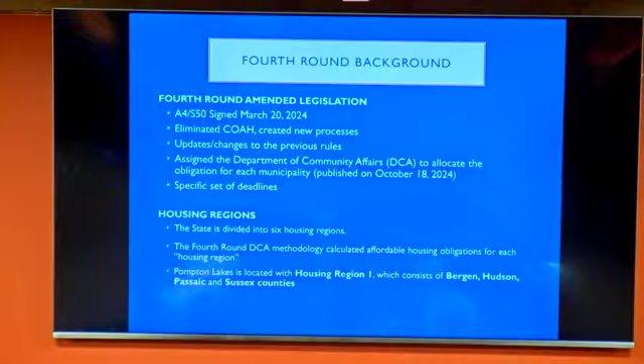It eliminated COAH, created new processes, updated and changed the previous rules, and assigned the Department of Community Affairs to allocate obligation for each municipality. It was published in October of last year, and that set forth specific deadlines, which I'll get to in a bit. So when we talk about affordable housing, every municipality has to provide their fair share for the region.

This is all mandated through the legislation. It's been around for almost 40 years, and the state is divided into 6 housing regions. The DCA calculated affordable housing for each of those regions, and Pompton Lakes is part of Housing Region 1, which consists of Bergen, Hudson, Passaic, and Sussex counties.

So for Region 1, what is affordable housing? Affordable housing is housing that's rented or sold by households classified as low and moderate income. The municipality must provide units as per their fair share, and each affordable unit must be reserved for low or moderate income for a period up to 40 years, enforced through a deed restriction.

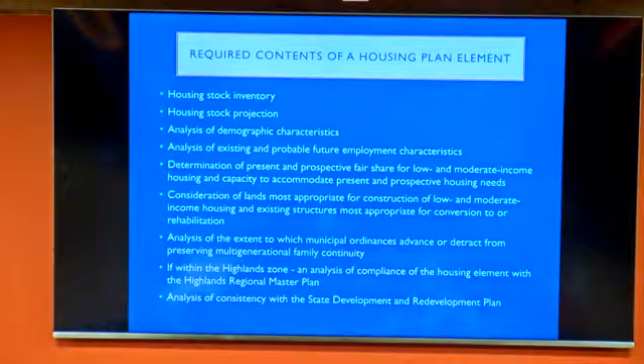So I go on to the next. What are the required contents of a housing plan element? The document that I submitted is basically based on what's required by statute. So we look at population demographic changes, employment characteristics, housing stock. We also look at lands most appropriate for construction of low and moderate income housing. And if it's within Highlands, we analyze compliance with Highlands and also look at consistency with the New Jersey State Development and Redevelopment Plan.

So, based on the DCA number, we have two things that we need to satisfy. First is present need, which is the rehabilitation share. It's an estimate of existing deficient housing currently occupied by low and moderate income households. They use census data; there's a whole process they've been using for the past 40 years. Our obligation is 45, and what that means is we don't have to do anything except have a program in place, which we've had.

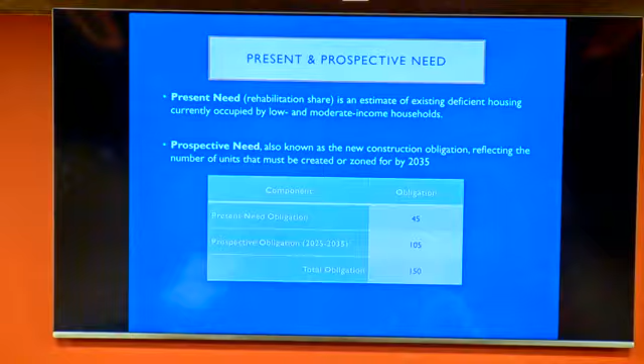I think we have Triad, who is our affordable housing administrator, so this is just a continuation of that. But then a new thing is the new construction obligation, which is prospective need. This reflects the number of units that must be created, zoned, or planned for the period from 2025 until 2035, the next 10 years. And that obligation is a total of 105.

So the statutes changed, and basically there are certain percentages that need to be allocated to family housing. There's a threshold for age-restricted housing, rental housing, low income, and very low income. And there's that threshold, as I mentioned, that is applicable to all affordable housing plans throughout the state. This is as per the statutes.

So now, really what is important is, can we really plan all the 105 units, which we all know is difficult since the town is built out, right? But the statutes allow for something called a vacant land analysis.

So when a municipality like Pompton Lakes lacks sufficient developable land, it's entitled to a vacant land adjustment, where a municipality is required to identify how much vacant land is truly available, and based on that, must create a realistic development potential, called the RDP.

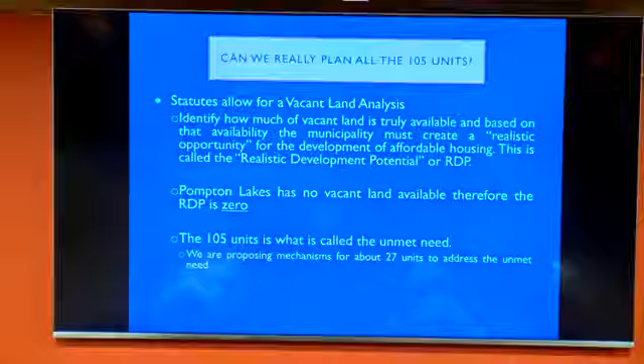The 105 units then is now what we call unmet need. That has changed with the new statutes, with the A4 legislation. In the past, you could just say this is your unmet need, and we understand we need to satisfy it.

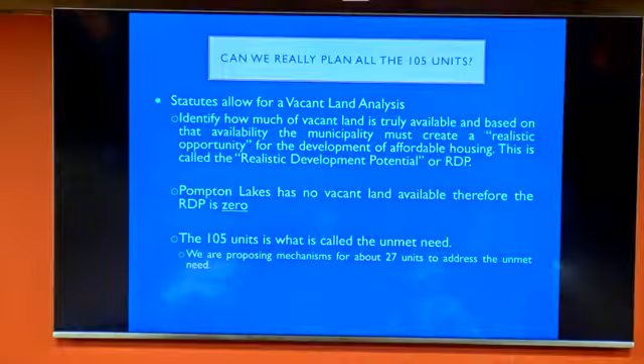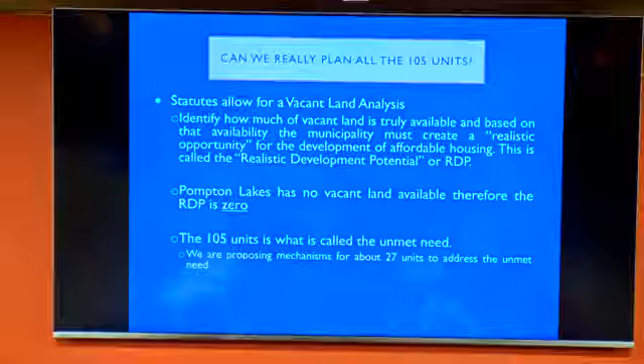In this iteration, the legislation wants to provide mechanisms to address at least 25% of the adjusted number. So 25% of 105 is about 27. The legislation isn't clear, we're not sure exactly what it means, but this is the most conservative approach, so we've taken that into consideration.

Moving on to the next slide - so how are we going to address the 27 units?

Our prior round had anticipated planning for future rounds, and in that was the Tilcon Quarry site and the areas around it, which was proposed to be rezoned to AH1, which the governing body did on December 4th, 2019 through Ordinance Number 19-26.

So we already have that affordable housing zone, and we anticipate this will create a total of 27 affordable units, which can be used to address our affordable housing need.

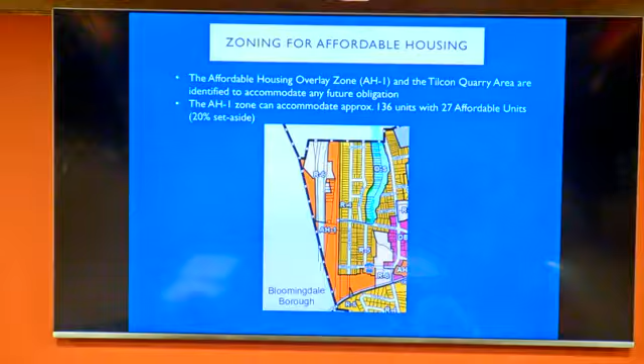Thank you. Okay, we'll go to the board first to see if you all have any questions about the presentation and what the state numbers are and what our method is of satisfying the state numbers.

I've got all my questions answered already. Okay, anybody on the board have any questions?

We're required to have a public session on this so the public has a chance to comment. It becomes part of the record. If you care to comment, come forward, state your name and address, and you will be sworn in because it needs to go on the record to the state.

So with that said, does anyone in the audience care to participate in the open session? Seeing none, I'm going to close the public session. We'll just note that there were no comments.

If the board is satisfied and doesn't have any questions, you do have a resolution that we prepared - it's adopting the housing element fair share plan and amending your master plan. If there are no questions and you're satisfied, I would recommend it be considered for approval.

Okay, so I need a motion to approve the resolution adopting the housing element and fair share plan and amending the master plan for the Borough of Pompton Lakes. I need a motion and a second. I'll make the motion. Mr. Trost? Second. Mr. Keating?

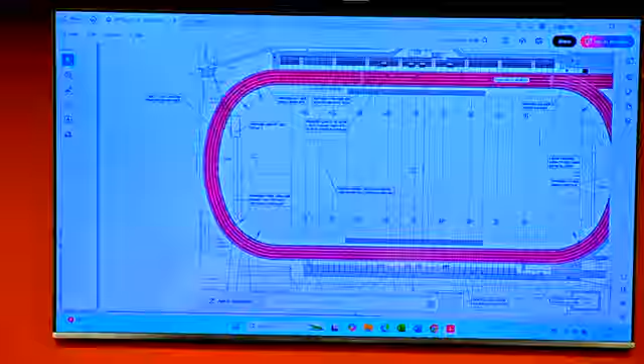So what you have in front of you is a proposed plan for improvements to the Board of Ed owned property down at Hirschfield Park. It includes replacement of the bleachers on both sides, replacing the existing press box, and replacing the cinder track with all-weather synthetic track. The limitation on the project, for various reasons, is that the Board of Ed has to stay within the existing footprint. So in looking at all of the possible options, and it's been a priority of the board for a number of years to make improvements down at Hirschfield, this is what we think is the best path forward.

To my right is Fei Shi. She is an engineer with LAN Associates, which is the architectural and engineering firm that the board uses. Thank you for the introduction. Hi everyone, my name is Fei Shi. I'm a professional engineer licensed in the state of New Jersey. My current license is valid until April 2026. I'm currently employed by LAN Associates in Midland Park, Bergen County. I have testified as a professional engineer in Paramus, Bergen County, Peapack-Gladstone, Somerset County, and also I've testified at this board for the Lakeside Middle School bleacher project last year, I think.

So I will quickly walk through the scope of work and some background information on this project. Just so you know, the electronic copy is a little different than the latest site plan that I have sent to the professionals and the board, so there's a slight change on the screen right now. The district wishes to improve their athletic facilities by replacing the running track, press box, and bleachers, along with the perimeter fencing and sidewalk installations. So this shows the new improvements that we have.

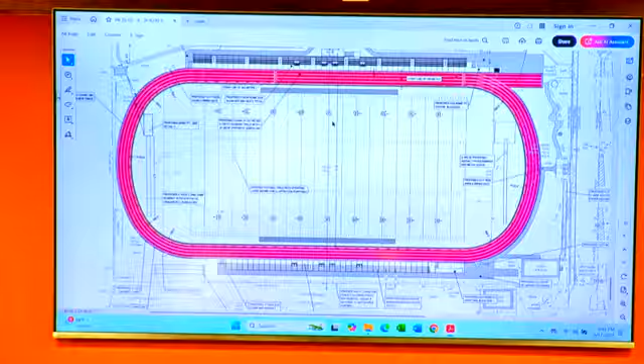We are going to propose 4 lanes of rubberized running track, and we're going to provide about 800 seating for the home side, which is Plan North, where my cursor is. And we're providing about 500 seating capacity for the visitor bleacher at the Plan South. Just so you know, the river is at the bottom of the plan, and the north is to the left-hand side. Our site is currently located on Hirschfield Park Place, and the site is bordered by the borough's properties.

So I covered the bleacher and press box. Because the disturbance is over 1 acre, this triggers the project to be classified as a major development defined by NJAC 7:8. We have proposed a 2.5 foot deep stormwater basin at this location. No, just one, yeah. We combined it. So it's showing 2 basins right now, but we have revised it to be just 1 basin at this location.

So the basin is to address the additional stormwater runoff. We have sized the outlet control and the basin to meet the current and projected storm events required by NJDEP. We are going to move to the next slide.

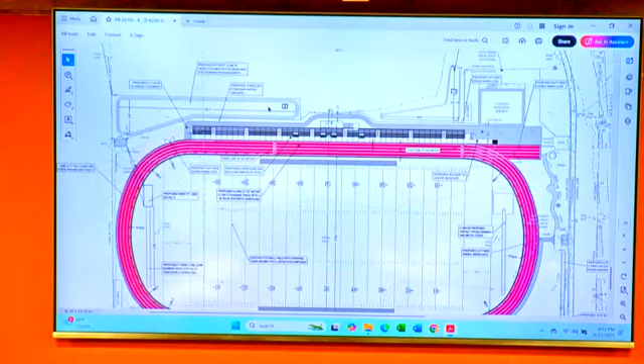We're going to pipe the stormwater and connect to the catch basin on the street, which is this one, if you can see my mouse.

All the work will be done within the school district properties, except for the demolition of the current press box, which is at the plan south. We will have the borough sign off on the property owner's certificate at one point in the future to allow us to officially remove the current press box. We will backfill and stabilize the ground once the foundation has been removed.

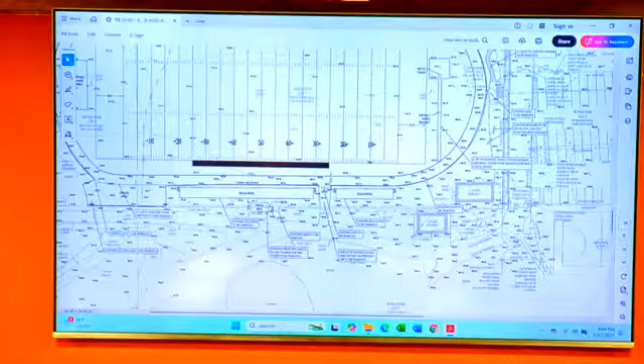I'm going to cover the courtesy review comments provided by Colliers. The first comment is that the applicant may wish to provide testimony as to whether these items will be salvaged and reutilized. So the school will be reusing the batting cage. We have confirmed with the school.

The second comment is the applicant should provide confirmation of the presence or absence of asbestos. So we are working with the school to get the records or reports of whether the current press box has asbestos or not. It's in the process.

Should I go over these comments at the board? Yeah, you should, because if not, she will have to as well. Okay, so we'll just coordinate it between the two of you.

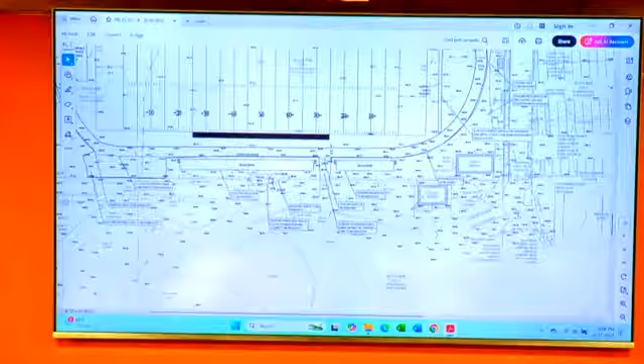Okay, comment C is about ADA compliance. It appears on both sides. Most of these are nothing for me to address. I think Comment C is a statement, really, about the sidewalks, not a question. Right, I agree with you on that one. Okay, yeah, also you're the engineer.

So I would move to number 2, grading and drainage for the site. Number D, the site plan proposed two vegetative stormwater infiltration basins. Initially, yes, but we revised the plan after doing the stormwater analysis, so we combined them into one. I think you probably received our latest site plan. I did. So all the updates are there. There was a discrepancy between the plans and the drainage plans within the stormwater report, they were different. Yes, because those were very schematic, used for the Department of Education submission. Later we had the full design.

Okay, thank you. So number E is still the same testimony on the stormwater regulations. Number F is the applicant should provide testimony to confirm the lighting. So because the existing lighting that the school district has is rarely used, and it's also going to conflict with the new bleacher and press box installation, the school has agreed to remove it completely.

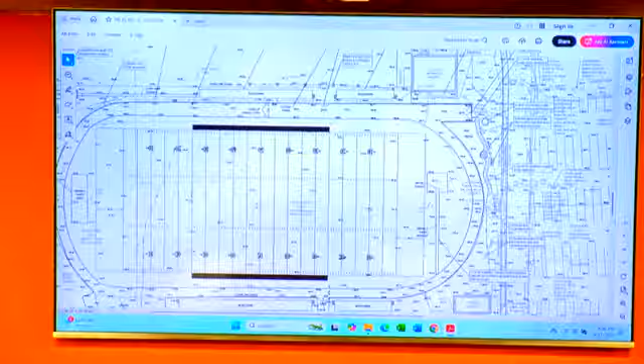So there will be no lighting of the field whatsoever? Right, those existing lights are the old lights on one side. We used to use those when the clocks changed and the season went beyond daylight savings time. Now, if and when that happens, the football team just moves up to Lakeside to practice, where we have lights. So there's really no need for those lights. The press box is going to the other side because we can fit more bleachers there without disrupting the batting cage, which is on the current home side. So there's no plan at this time to add lighting, so we would continue playing Saturday afternoons.

Thank you for confirming. I just noticed you were removing lights and none were going back in, so in terms of timing, when the kids use the field, that was my concern. But I think you just answered it.

Three or four sets of banks of lights. They've been there for 30 years, maybe longer. We will at least provide emergency lights for the bleachers.

Sure. I think I addressed all your comments. Does anyone have additional comments or questions?

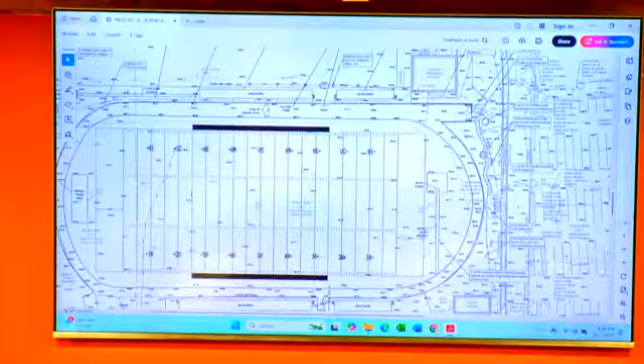Anybody on the engineering portion of it? I would assume that the reason there's 4 lanes is because you can't get another couple of lanes in there to make it official.

We looked at a 400-meter regulation 6-lane track, even a 5-lane or 4-lane track, and that track would extend beyond the existing footprint. It would have to be angled about 30 degrees, and it would encroach upon designated green acres space. So we had a meeting with the DEP, and it seemed that could potentially delay the project many years, without even being sure at the end of that review that we'd be able to do anything.

So it's a 330-yard track, but with 4 consistent lanes, synthetic, all-weather rubberized track. The advantage is that our sprinters would have a 110-meter run on the north side, which is enough for spring boys' hurdles, girls' hurdles, and 100-meter sprinters. Right now we don't even have that for the kids. And of course it would be open to the community, an improvement for everyone.

Do you have a time frame for when this would start and how long it would take to complete? I think it's about a 14-month lead time. After the final design, we have to submit to DEP to get an individual permit because it's in a floodway, so that will take at least half a year to 8 months, maybe a year of review. Then once we get permits, we can go out to bid. We had slotted it after the fall 2026 football season, if things move along, so that's about a year and a half.

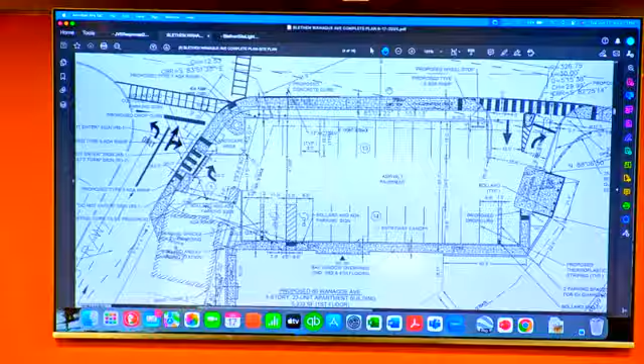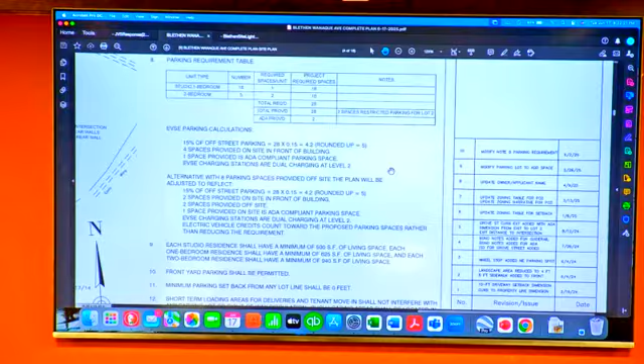So now that you've identified what it is in front of us, if you can say what the revision date of this document is, and then we can mark it as an exhibit. The revision date on this document, the full one, is June 12, 2025. And this document was prepared to make changes in connection with the June 4th letter from Colliers? Correct. Okay, Mr. Brewer, this will be marked as A1.

And are there hard copies that have been provided to Carm? There could be, but we... Yeah, they're gonna have to be. Yep, of course. Okay. So what sheet is that? This is sheet 4, which is the site plan.

If you don't mind, I'd like to go through the comments real quick from the engineering firm to show what has been changed and what we're talking about, as far as, I think they have like 20-some comments. Some of them are architectural, I won't touch on those, but as far as the site plan goes and what they were looking for: proposed front yard setback, there was a mistake in that.

That was a carryover from the previous engineer. They actually measured from the front right-of-way down to the dumpster enclosure instead of to the front of the building. They used that ancillary building as the setback, but the true setback of the building is 65.7 feet, and it's shown. So that's been corrected in the zoning table.

The easements are obtained, and when we have the easements from Grove Street, those are the county easements. Those are the surveyors taking care of those things.

The EV spaces, I've actually swapped the EV spaces over here on the left-hand side to make it compliant because there's an EV bollard plugging charging station here, and there's one on the other side of the parking lot as well. These are regular spaces. My original plan had an 8-foot here and an 11-foot opposite it, but in order to have an EV van or whatever parked, I swapped those spaces to make it more accessible.

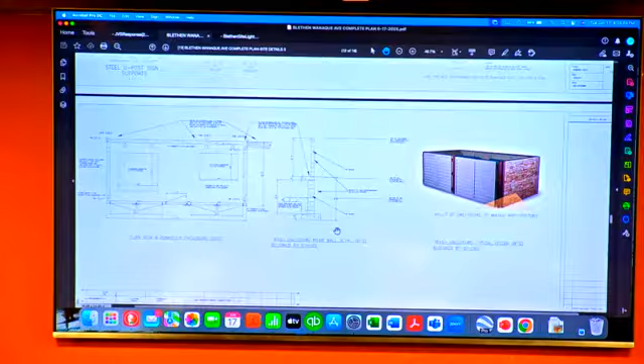Is this a revised plan? This is on the revised plans, yes. So what sheet is this? A2, this is sheet 12. And revision date? 6/15. That's going to be A2.

The question was, what are the elevations for the side, top of the walls? This is a standard dumpster enclosure, 6-foot high walls. The bottom of the wall around the area is 206, and the top of the wall around it will be 212. One of the things that was requested was, what does this dumpster look like?

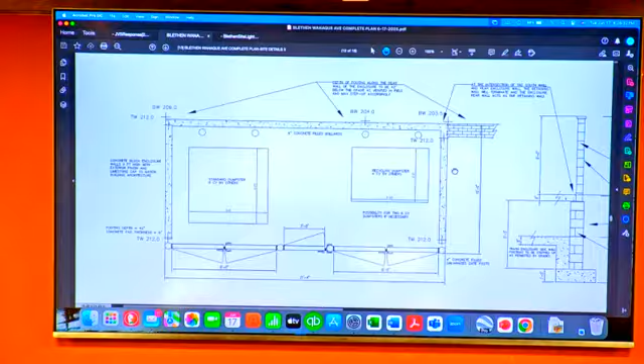So I've added a typical dumpster that is supposed to be built. It can be built similar to this, but at least this shows what the dumpster looks like with the gates in the front, double gates, 2 dumpsters in there. The side parts of these walls will be matching the architecture of the building, so it blends in and doesn't stand out. It'll be a nice blended look to it.

And these are prefab things, you can get these made, but this is for a double dumpster, a size of 20 by 10, to hold the 2 standard dumpsters we have planned for. So that was one of the questions that was asked.

The signage, that's something else for a later date.

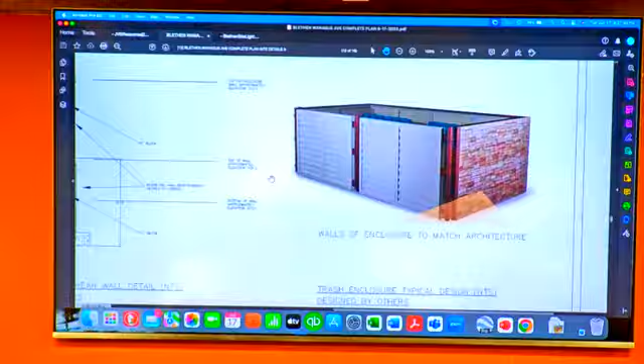Some minor details: the lot boundary, the zoning map, the tax map should match the boundary provided. Those were changed, even though the tax map is wrong, by the way. I went ahead and overlaid those on the title sheet to make sure the actual survey matches the actual property lines. You can see in here the tax map doesn't actually match it, but I went ahead and put the correct survey in there. It's just a minor detail.

If that's a change you're talking about, let's make that A3. Is that a change from the current plans? That is a change, yes. Okay, that's A3, the cover sheet. What sheet is it? Sheet 1. 6/15. Thank you.

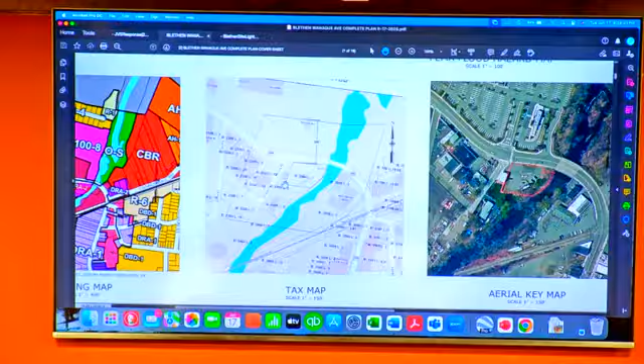Now, the limit of disturbance on these plans did not include the original sidewalk on Wanaque Avenue. So we've increased that. It was 18,400 square feet of disturbed area, that is increased to 21,300 square feet. So I went ahead and redid the limit of disturbance, which is on sheet 2.

Sheet 2 would be revised, sheet 2 revised through 6/15. Has your sheet been changed? No, just sheet 5, so it's your preference, Mr. Brewer. I'd rather see the whole set complete, instead of trying to pick out sheets.

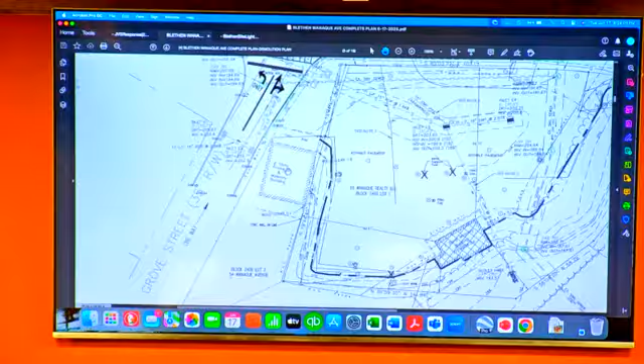Normally what we would do is come in here for resolution compliance, we're happy to satisfy that, but ultimately it will be a matter of your engineer signing off on what is in her letter, which we're in agreement with. There may be additional changes, but let's just agree.

Sheets, all of them have been presented, we're going to make A4 the remainder, all of your pack. How many are there, and what's the revised through date? I guess any that's been revised, the latest is 6/15. Correct, that'll be the latest. Sheets 1 through how many? 18. 1 through 18, revised 6/15/25.

Okay, that's going to be exhibit 4, the rest. That'll make it easy. I think there's some parking changes, a couple things, now you can talk about them without having to go through it all.

So anyway, it's in an AE zone on the floodplain. We have a copy of the DEP permit, we've had that since like 2022. There's been a de minimis change, I already talked to the DEP about this, so I have to do an amendment. It deals with like 50 square feet of either a change from impervious to pervious or pervious to impervious. Everything is within the same boundary, the same footprint, the same everything.

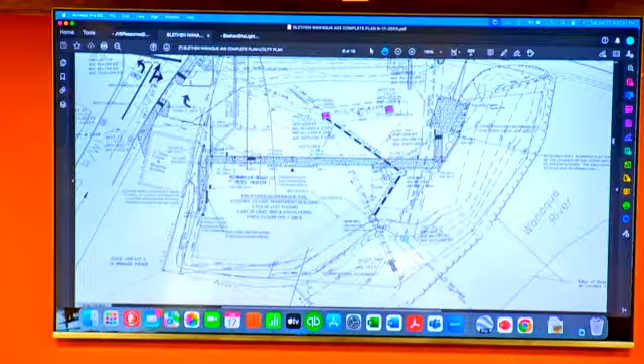So the easiest thing to do is what we did with the county, up in the one corner where we were close to the right-of-way, was put wheel stops back away from the sidewalk to keep cars from overhanging the sidewalk by 2 foot. That seemed to appease the county, because they were trying to do the same thing - they want us to move our parking lot back, and we can't, to meet the minimum 24 width with 20-foot parking. So the solution would be to put wheel stops, as proposed, on all the parking spaces along the front of the building in front of the sidewalk.

The proposed depressed curbs, aprons and sidewalks are all per the county, and the county has already said that our plans meet their state and county specifications for curbs, depressed curbs and sidewalks.

The overhead existing poles, that's okay, all that stuff will be removed. The gas station - I don't think there's anything left at the gas station. I think that's all been dug out and gone, I think.

Site illumination: the only thing that is on the plans is the building facade lighting on the front of the building that is projecting into the parking lot. It meets the parking lot requirements halfway because it's 1-foot candle within the parking lot area.

What we did is have an electrician go out and take a meter reading a couple nights ago, around 9:30 at night, and did a foot candle reading on the side of the parking lot on Wanaque Avenue, and it exceeded 1-foot candle. So covering half the parking lot with that and the other part with the street lights and our facade lighting, it meets the 1-foot candle requirement within the parking lot area.

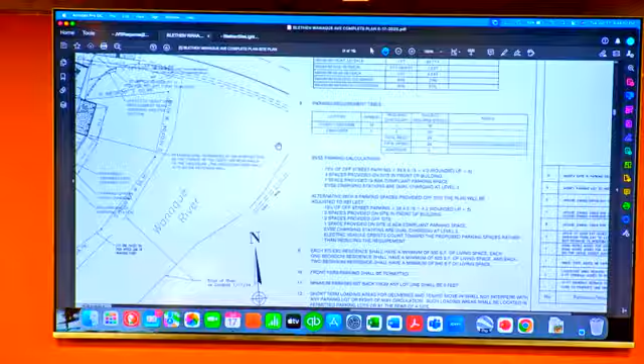No, the eight are part of the county's project. It's a much larger parking lot. Those 8 spaces are part of the project, we're doing a license for a period of time. So they're gonna have to install EV spaces based on those 8.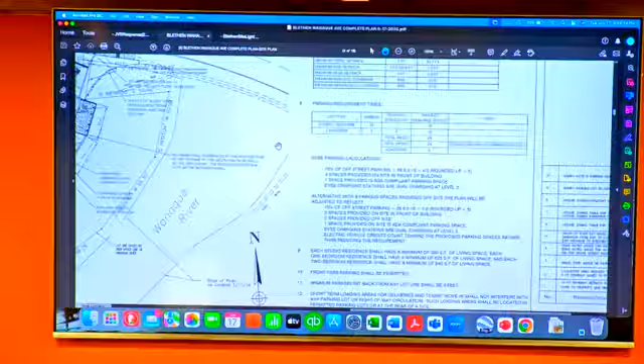So you have on-site 28 spaces, 4 of which are EV. 4 EVs on-site. And how many ADA spaces? 2. On the EV, 1, so 3? You have 1 EV ADA and 2 regular ADA? 3 regular EV, 1 ADA EV.

How many regular ADA spaces do you have, not EV? 2 on-site. Okay, but one of those is EV. But that one doesn't count towards ADA. Correct, so you have 1 regular ADA space.

Of the 26 on-site parking spaces, for our building we have 2 more dedicated to Lot 2, but 26 are for our part of it, and then 8 off-site. I'm just trying to make this as clear as possible. On-site, you have 26 parking spaces. Correct, 4 of them are EV spaces. Correct, 1 of them is a regular ADA space. Correct. Okay, and that meets the ADA requirement?

Yes, because you need 5% of the existing EV, which means you need 1 ADA per 20 EVs, it's 5% of the available EVs. The EV ADA space is separate from the ADA space. Yes, there's an ADA space and then there's an EV ADA. Right, but the regular ADA space, you can't use the EV ADA to count towards your ADA requirement, which is why there's 2.

Right, which is what I understood. Okay, thank you. Mr. Malinik, you made a comment just now about you having this easement with Passaic County for a time, defined for a time. Oh, I think it's not negotiated, it's not signed because we haven't gotten this approval, but the negotiations that have been happening are for 99 years or 100 years.

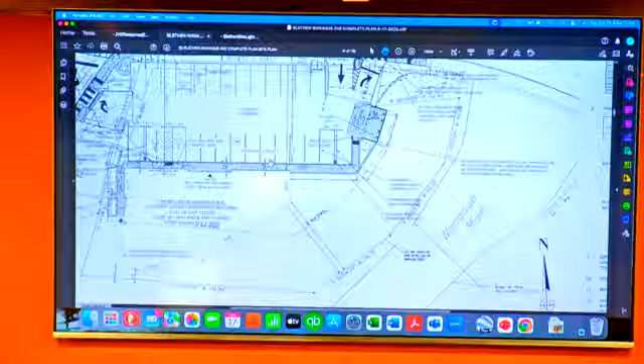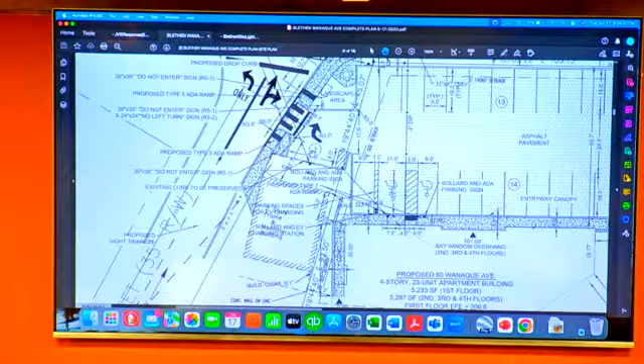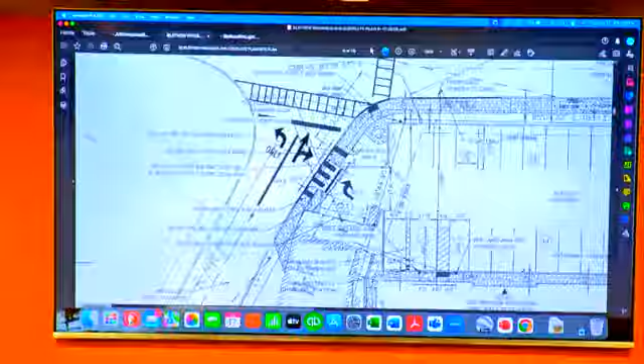So this is a bit of history. It was confusing for a long time. There's a piece of property, Marvin could point to it, right in front of that building, which is neither on our lot nor their lot, and it's not deeded to the county — it's part of the county right-of-way. Speaking with the county engineer during the planning board process, his suspicion is that years ago this road extended to that area and was modified when they installed the bridge, and it probably wasn't papered the way it should have been. So out of an abundance of caution, we're taking an easement for whatever interest the county has in that property right in front of the building. If you drive past it now, the parking for that building in Lot 2 is actually in the county right-of-way, which the county has allowed.

So then the 2 dedicated parking spots you're offering them are where? The one right there on the corner is partially on the county property and partially on our property, so both the county and we are giving easements to that lot. The second small space is right in front of the building, in the county space, again part of our access agreement with the county.

Can I add some information? When the owners of the property reached out to me, I called a meeting with the county and asked if there was something we could work out with the developer and the town, since they didn't have dedicated parking with that building, even though they've been residents of the town a long time. So we all sat down and discussed it, and I have to say all the groups, including the county, were helpful in making that happen. This wasn't a requirement for anybody — it was added on afterward to get them the 2 spots, which is the number the owners of that property had asked for.

Thank you, Mayor Sarah, for setting that up. To the mayor's point, the fact that they didn't have parking shouldn't really be a factor of our application. I'm sure our applicant wanted to do whatever he could to satisfy them, and that was a very good result for everybody. There are 2 commercial stores there — they were satisfied. Those were the owners of the property. Those are tenants, right.

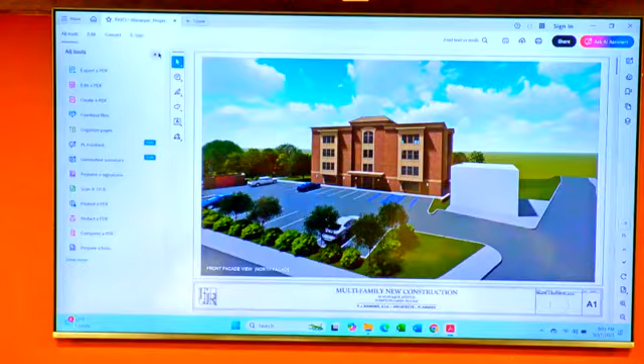All right, seated to my right is the project architect, Jeff Rawding. I'll ask him to be sworn in. Raise your right hand, state your name, spell your last name. Jeff Rawding, R-A-W-D-I-N-G. Do you swear or affirm the testimony you'll give this evening before this board will be the truth, the whole truth, and nothing but the truth, so help you God?

I do. Mr. Rawding, can you give the board the benefit of your education and experience, please? Certainly. I'm a graduate of Ohio State University, 1979. I've been a licensed architect since 1984. I'm licensed in this and 9 other states. I own a firm in Morristown called F.J. Rawding, AIA. I've testified before numerous boards throughout the state as an expert architect. I don't believe I've been in front of this board, but I have been qualified as such, and my license is acceptable.

Thank you, Mr. Chairman. Mr. Rawding, can you explain what you did in connection to this application and the architectural plans and renderings that were submitted? Certainly. We've been engaged on this project for a number of years, and we were asked to design different concepts. Ultimately, the one before you is a 4-story building proposed with 23 units. We have set this unit back behind the parking space, parking lot that the engineer described.

And if you'd like, I'll go to the design of the building itself. And everything that's on the screen is part of the application package? Yes, I'm 100% positive that it was filed. This is going back, this is A1. This is the front elevation of the building. It's a rendered front elevation of the building.

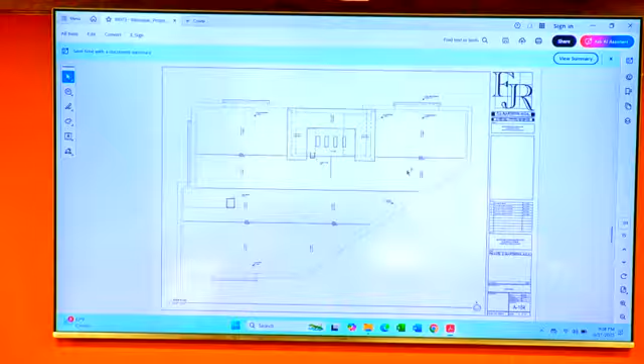Again, we can go through the materials, but essentially it's 2 bay-like units on the front of the building, then the unit windows on the first floor beneath it, and the canopy in front at the entrance. There's a little bit of an arch detail in the center, 3 distinct elements of the building.

The entry tower is slightly set back from the front facade. This will just carry around the building in plan form as opposed to rendering form, but it's virtually the same as what you saw before, so you can see it here on the back side of the building as well.

The overall building height is 48 feet to the cornice, and then we have the little appendage over the tower that gets a little higher.

That is pretty much my direct testimony. I'd be happy to answer any questions you might have.

This design was the product of multiple meetings with the redevelopment agency and comments that were received and accepted and modified until it was approved to the redevelopment agreement. Is that correct? A number of times, yes. Yes, a number of times. No further questions. Thank you.

Just again, members of the board, this was pre-approved in its appearance, setbacks, and all parking with the redevelopment agency. So we really don't have any discussion per se on the insides of the buildings or the number of units. We have site issues that we can discuss, but that's primarily the main scope here. So does anyone have any questions for the architect?

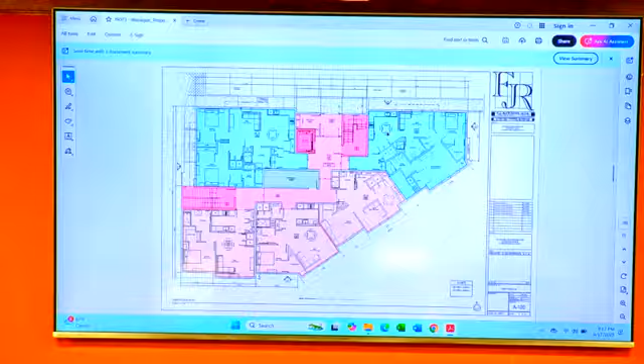Vehicle entrance. Now, I know right now there's 2 access points existing. So the proposed, with the one driveway coming in, for the engine to come in, what would be the preferred way for the fire truck to enter? Because I noticed there's an island, so in order... I would think that the entrance closest to downtown would be a little bit more accessible than the one down on the other end, but from a planning standpoint, I think it's easier access past the dumpster there. Okay. And the fire department did raise no issue with the design?

Okay, except for item number 1. So attached was the turning radius of the apparatus, and I didn't get a response. Was there one? I'm not sure. Fire department, I'm sorry, no. So my response is we're accepting it, and we'll provide everything we need to satisfy the fire department and the resolution plan. Okay, good, all right, because I think that island there might need to be, if it needs to be a mountable island, we can talk about doing that.

Okay, now again, my concern was the 7 feet that is in between the building. So is there any reason why that building just can't be shifted to give a proper, say, 10 feet from the property line, rather than just 7 feet? We can bring up Mr. Blethen back again. I'm not sure if that's related to the DEP envelope as well, but we can have that answered. Yeah, I'd have to defer that one.

Okay, do you have any plans for a generator in the building? Not that I'm aware of. No. Okay, that's all I have. Thank you. Anybody else have any questions?

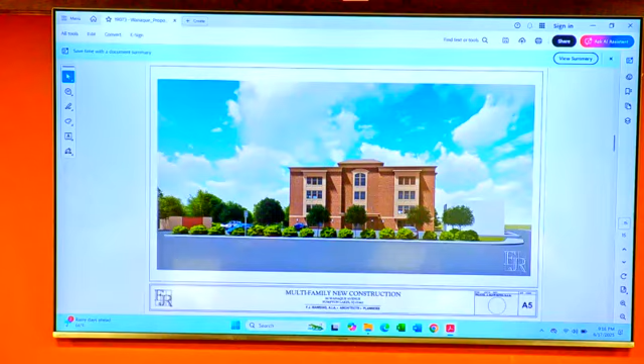All right, at this point in time, I'm going to open this meeting. Oh, I'm sorry, Mayor, I always ask on all the projects, we always forget, is there going to be a pet area, even if it's small, enough to take out? Is this a pet building, first of all? I don't think that's been determined yet, but I do know that we have a little bit of a fenced-in area to the rear of the property that could accommodate. Right, somewhere where they can take the pets out. Weren't you offering your property for that?

Sure. Okay, at this point, I'm going to open up the meeting to the public. If there are any questions for this gentleman or the previous gentleman on this project, please let me know. Seeing none, I will close the public session.

Yes, sir. All right, so I guess before we vote, one of the things I am uncomfortable about is the parking spots, the 8 parking spots, because I know that the EV is going to be a pretty far distance, so I'm not sure what the county is going to be offering you. I probably would have liked the traditional Wanaque setting where there was commercial on the first floor and residential up top. I think also I guess when we made the recommendation back to the mayor and council, we did say, and had a recommendation, no one-room suites. And again, there is one-room suites. So again, I think, in my opinion, there could have been a better building suited for that spot. And I'm kind of not agreeing with what's being proposed. So I just wanted to share my opinion.

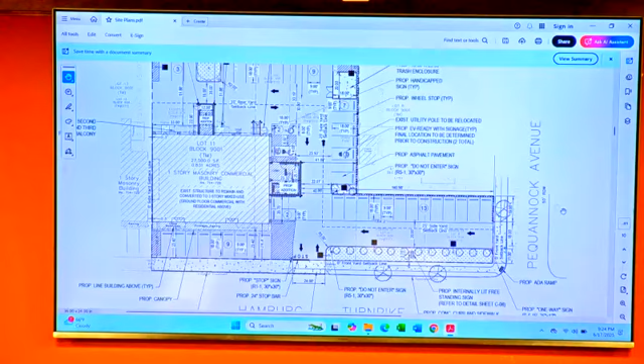The site is a retail site. Currently it's a retail establishment, 1-story building, located on Hamburg Turnpike, with the nearest cross street at the intersection of Hamburg Turnpike and Pequannock Avenue. Currently there are 4 retail stores occupying the existing building. I'm looking at sheet C-02, which shows the existing conditions - the existing 1-story building with 4 retail stores. There is parking in front of the retail stores facing Hamburg Turnpike. Approximately 9 parking spaces are present in the front, and then we have about 13 marked spaces along the northern property line.

The lot is an L-shaped lot, as you can see on the screen. Pequannock Avenue is to the plan right, Hamburg Turnpike is to the plan bottom, so that's the site. As far as access to the site, there is a curb cut on Pequannock Avenue that serves the retail store building, and also a curb cut or access from Hamburg Turnpike that also serves the retail stores. The proposal - should I go to the proposed? Okay.

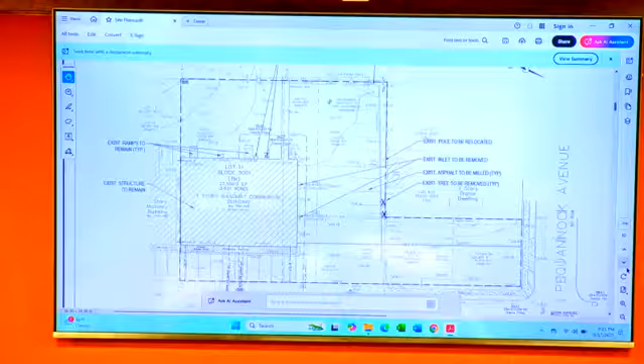The proposal for the site is the existing structure will remain, and the applicant is proposing to add 2 more stories to the existing building and construct a residential component, making it a mixed use property. The retail will be on the ground floor, and the second and third floors will have 10 apartment units. Our architect will go into detail about the layout and elevations. So that is the proposal.

Also, as part of the proposal, we are proposing a lot of site improvements on the property. We are keeping the driveway on Pequannock and keeping the driveway on Hamburg Turnpike. We are relocating and slightly modifying them to make them more per standard. Currently, the driveways are either too big or too little, so we are sizing them based on the vehicle circulation we anticipate. The driveway on Pequannock Avenue will be one-way in, only to the property, and the driveway on Hamburg Turnpike will be a full access two-way in and out, ingress and egress driveway.

We are also repaving and restriping the parking area, providing 45 parking spaces proposed for this project, and I will quickly go over my parking calculations after I finish the site layout. So there will be 45 parking spaces that we are proposing, including 2 handicap spaces.

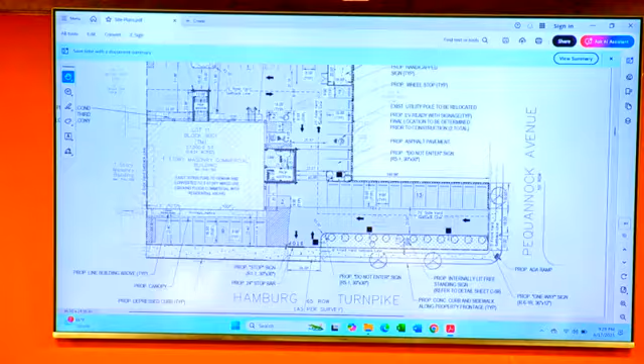We are seeking some waivers and variances, and I'm going to touch base, and then we have a planner who's going to go in detail for the justification. There are 2 shade trees proposed along Hamburg Turnpike, and 1 shade tree proposed on Pequannock Avenue. We are also proposing some landscaping to screen, with shrubs to screen the parking lot, that L-shaped element, from Hamburg Turnpike.

Also, as per the ordinance requirement, there are certain requirements to break the parking lot with certain green spaces. If you have more than 10 spaces, it has to be broken up. So what we are trying to do is add that element wherever we can. We are providing some green islands in between the parking. Again, we don't fully comply with the requirement, so we still require a variance for that, but we are trying to accommodate by providing 1 green island along the right side of the building and 1 to the rear.

Clarifying question: can you discuss the shade trees in the rear of the parking area, how many we're proposing? In the rear of the parking, we are proposing one shade tree in that green island. And how many are required? I believe for shade trees we are required one every 40 feet. But because of our limitation with the existing parking in the front of the retail, which is currently being used, we're not proposing any in that area because that is an access for the cars coming in and out to the retail stores. That is an existing non-conforming condition.

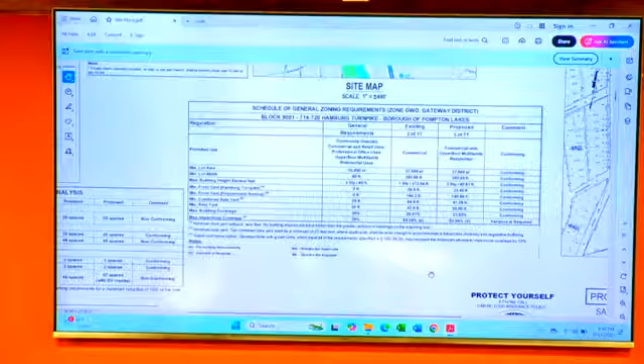As far as the bulk requirements, we are seeking 1 variance, everything else is conforming. The lot area, lot width, building height, side yards, rear yards, they are conforming. The 1 variance we are seeking is the lot coverage. 50% is required in a gateway district. The existing site is 89.20%, a little shy of 90% impervious. We are proposing an increase of slightly less than 5%, which is 93.8%.

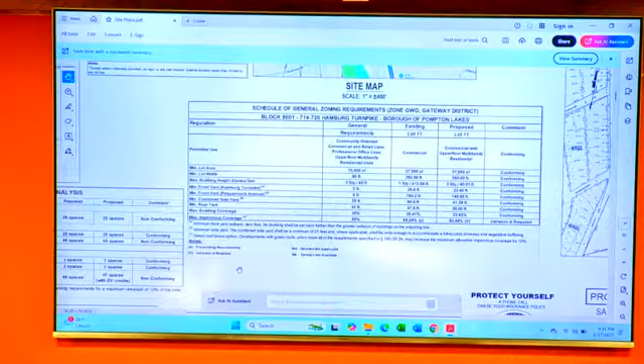So that is one of the variances we are seeking. The other is the parking. I'll quickly go over the requirements. The retail component, approximately 5,611 square feet, based on the borough's ordinance, requires 28 spaces. We are proposing 25 spaces to serve the retail, so that's short of 3 parking spaces, which is a non-conformity. For residential units, 10 units at 2 spaces each requires 20 spaces. We are proposing 20 spaces.

So if you do the math, adding the retail and residential component, 48 spaces are required, and we are proposing 45 spaces. However, since this proposed project is more than 5 residential units, it qualifies for EV. We are required to provide EV charging stations, and we are required to take credit of 10% of that. So if you do the math, we are required to provide three EV charge spaces, and we can take credit for up to 2 cars. So if you rearrange the math, 48 spaces required will go down to 46 spaces. We are providing 45 spaces, so we are short 1 parking space for the combined use after taking the credit for EV.

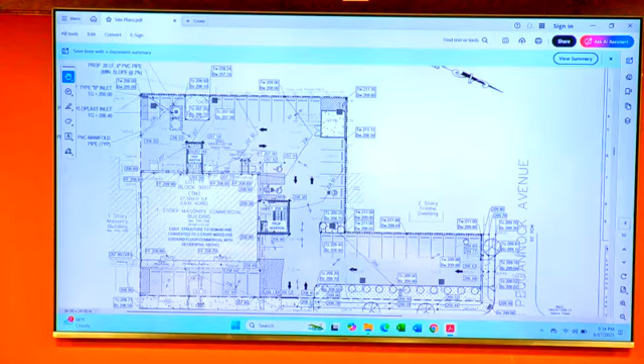As part of the grading, we are proposing a retaining wall, and I know there are some questions in the Collier's report which I'm going to address. The retaining wall runs along the western property line to the plan north, turns to the side, and then goes again to the property line in the area close to the Pequannock. The wall's maximum height is 3.5 feet or less, so it's not a structural retaining wall, it will be designed as a gravity retaining wall.

I believe there was a question in the engineer's report about how the geogrid will be fixed. The design is not finalized yet, and we will work on the retaining wall design if this application gets approval, but it will be designed as a gravity wall which doesn't need any geogrid. That will extend to the neighboring properties because it's less than 3 feet, and it tapers up and down as it goes.

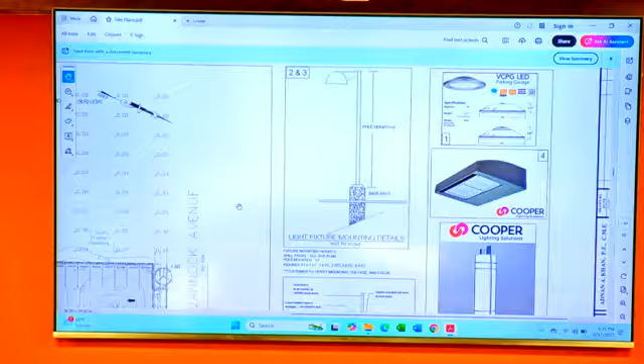Site lighting: we are proposing all new lighting on the site, a combination of light poles and wall packs along the property. The light fixtures we selected are all LED type, full cutoff, downward throw to avoid any glow and glare to adjacent properties. Based on the comments we received on the first round of plans submitted, and the report from Collier's, the plans you see now already address quite a few of those comments, including providing the average lighting numbers, which we complied with.

Traffic circulation. We are showing 2 vehicle circulations. One is for the garbage truck circulation that can access the trash enclosure, from either Pequannock or Hamburg Turnpike. They can pull up to the trash enclosure, it will be rear end loading and unloading. They will load, turn around and leave. Pequannock is one way in, so they leave through Hamburg Turnpike.

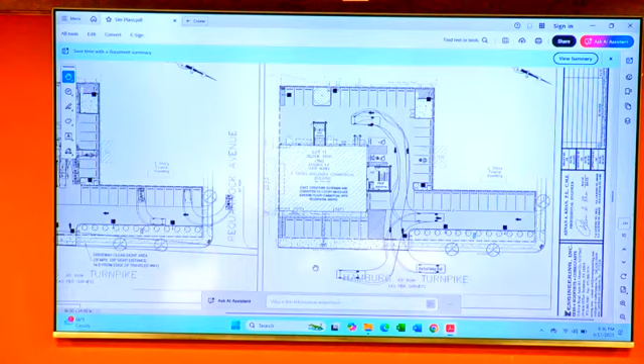The same situation is for passenger cars. We are showing the parking. Again, there is a concern and a waiver or variance we are seeking for the aisleway. The aisle width required for 90-degree parking is 24 feet. For most areas we are proposing 24 feet, however in certain areas we have less, one being to the right of the existing building. Because of the proposed addition, we have 20.17 feet there. We made sure the circulation shows that even though it's less than 24 feet, cars can come in and out of the parking spaces and maneuver either way. So overall, based on my professional opinion, this traffic circulation works with access to the vehicles we anticipate coming in and out of the property.

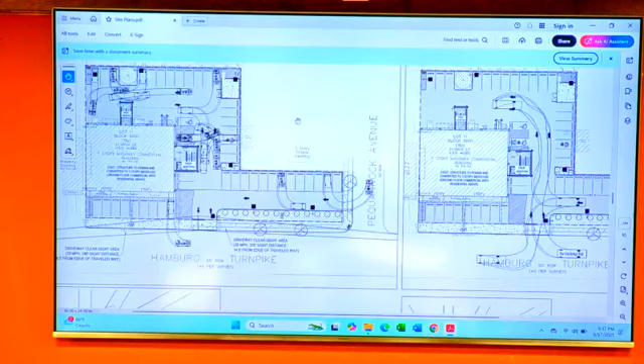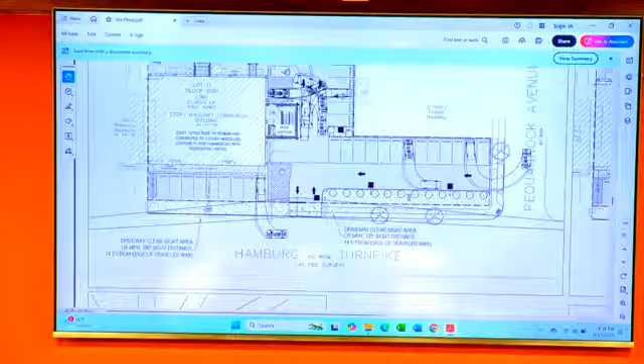One other comment is about loading and unloading. There is no designated loading/unloading area on the property. However, what we discussed among our project team is that we have an area next to the parking spaces in front of the store that we are hatching for proper circulation of cars in and out. Right now there is no such hatching, so it's to delineate traffic flow coming in and out, following the lanes out of the parking. We are reserving this hashed area for vehicles traveling through the parking areas, not to occupy it. But temporarily, this area can be used for loading and unloading, both for residential move-ins and move-outs. Again, it's only 10 units, so we don't anticipate move-ins and move-outs very frequently - there will be yearly or 2-year leases, so it might happen infrequently. But I think this space can be utilized for move-in, move-out, or any deliveries to the retail stores.

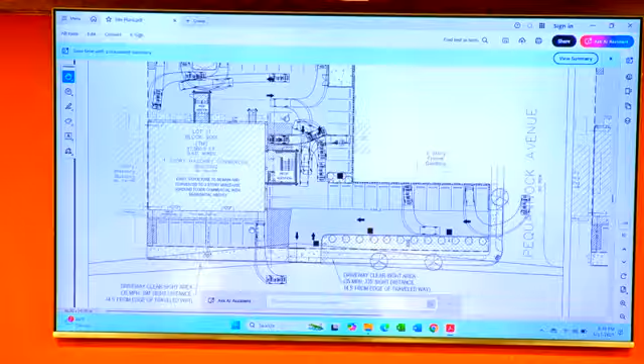I will quickly go over some of the design waivers and variances we are seeking, and our planner is going to go into detail, I'll just touch on them. As I mentioned, we are asking for a lot coverage variance - 50% is allowed, we are a little less than 90% existing, and we are asking for 93.8%, so slightly over existing.

We are proposing car parking in the front yard, which is not allowed per the ordinance. Parking at 0 feet from the side yard, 1 foot from the rear yard - there is a 10-foot requirement, I believe it's 10 foot, but we are not complying, so we are seeking that. For number of parking spaces, 48/46 spaces are required; after the EV credit we are proposing 45, so technically we are 1 short of the requirement. The trash enclosure is 1 foot from the side property line and 10 feet from the rear yard, however it should be 17.5 feet since it's considered an accessory structure under the borough ordinance. But we think the location, tucked in the back, has a natural landscaping buffer between our property and the property behind.

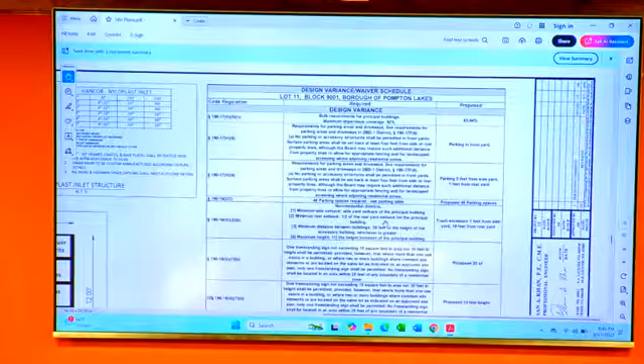There are fully mature trees that currently exist as a buffer, so that will screen the trash enclosure.

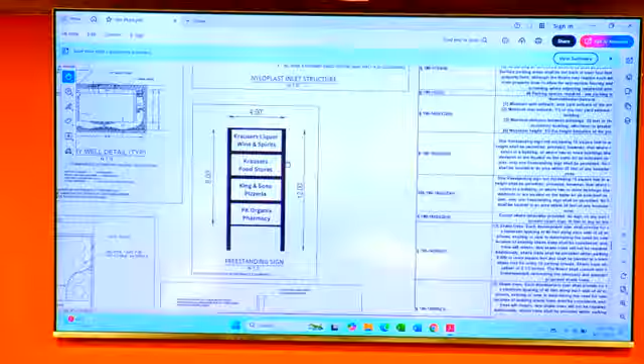For the freestanding sign, right now this is just a concept that the applicant would like, it's not finalized yet - it will be done more tastefully based on board approval. But this is just an idea: 10-foot height is required, the applicant is proposing 12 feet, because we have 4 businesses and want their names displayed. If the board wishes, the height can be reduced to 10 feet to comply. For square footage, 15 square feet is required, we are proposing 32 square feet, which is more, but the idea is this is a 4-store retail building, so we want proper coverage for all the retail stores.

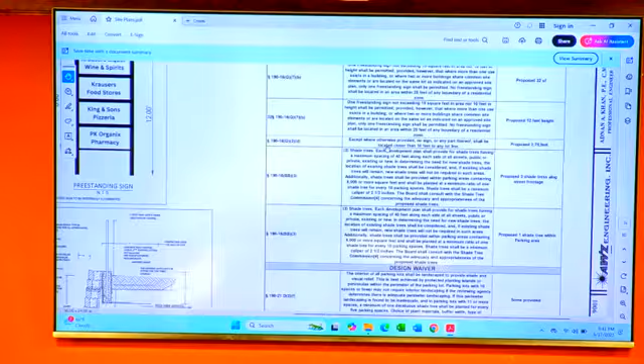The other comment is the location of the sign on the property - 10 feet is required from the property line in the front yard. Just quickly covering that.

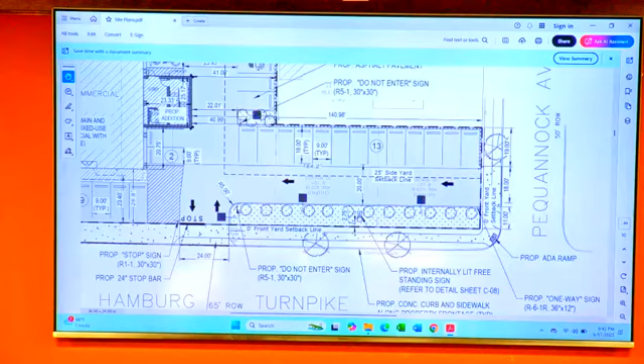We are proposing the freestanding sign to be located 2.75 feet from the property line, but there is an additional 8 to 10 feet from the curb. The reason for this is the visibility of the sign. We want the sign to be visible for any patrons that want to utilize these stores. Pushing it back 10 feet would impede the driveway access and parking area, and would push the sign's visibility further back than practical for cars traveling on Hamburg Turnpike or Pequannock to see. So those are some of the variances we are seeking, and I believe I covered everything.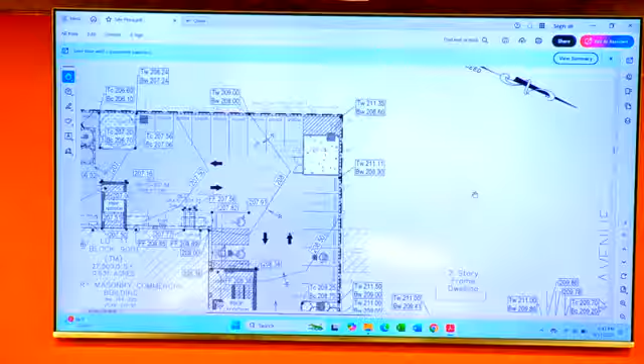We can go over the report if you want. And just a clarifying question, the last design waiver listed in your table, can you speak to that a little bit to clarify? Yes, I can, let me go back.

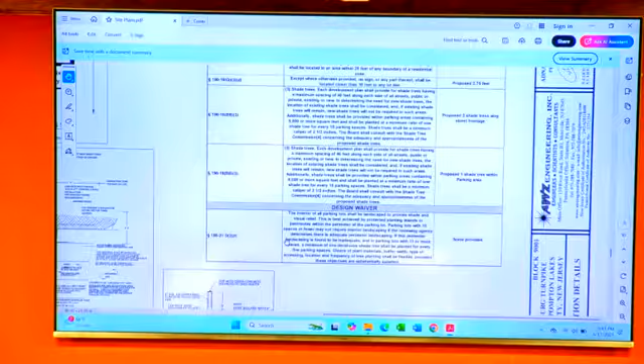The interior of all parking shall be landscaped, and as I mentioned, the landscape island is a waiver we are seeking. It's a design waiver, because in order to comply with getting close to the parking requirements, we are proposing green islands wherever we can to break the impact of complete landscaped parking and drive aisle. But that's a waiver we are seeking.

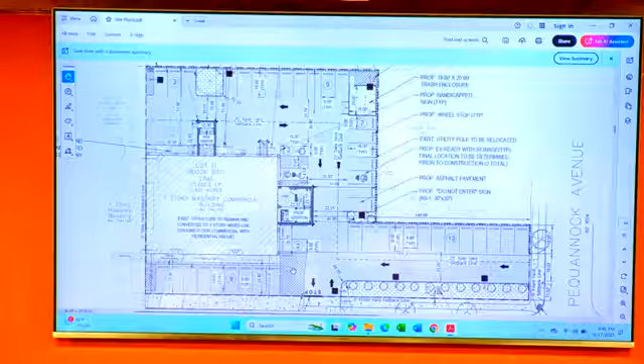On that though, I would add that you provided testimony it would be infrequent use for move in, move out, but I can tell you there will be multiple deliveries a day when we're thinking about Amazon, UPS, and FedEx. So that space will be occupied frequently.

So I'm not saying that is a positive or a negative. I'm just saying we should be mindful of the fact that that space will not occasionally be occupied, it will be occupied several times a day. And however it is marked, it may even be prudent to put up a sign, like the size of a handicapped sign, that says for deliveries or something like that. Because if it's striped, an Amazon van would think that they're not allowed to park there, when in fact that's the intent of that space.

Yeah, we can actually do a sign, and we can also mark the pavement, deliveries only. That's not a problem, we can do that. And we can do that as part of resolution compliance. Oh yeah, you change your plans.

Okay, so that'll be addressed, should the project be approved tonight, in the resolution compliance set.

The bump out in the back, I know that's probably more for the architect, but was there any consideration to reconfigure it? Or is there a reason it's so narrow and long, and not more square to the building, so it's not protruding as much? I don't know if you can answer that. I would leave it to the architect to address that.

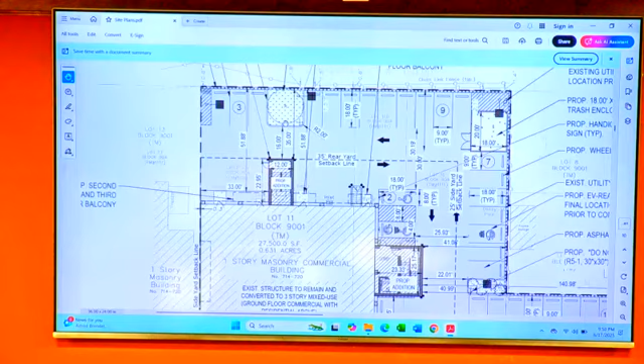Well, she was making a point of how narrow it is. It's very narrow — understood — and it's the width of a couple parking spaces, so you have 3 parking spaces. So if you move this to the left, to the last parking space, you're going to gain that space back over here for 2 more parking spaces. We will. The only thing is, if a car is parked there, the drive aisle width is still like 16, maybe 18 feet.

So, if the board wishes, we can — as far as the retail, I know the parking variance is basically created by the requirement for retail stores. Currently I counted approximately only 23 spaces that serve these stores. There are no changes anticipated in these stores as far as what the uses are for the parking, but the requirement takes us to 28 required. So currently 23 spaces are serving, and I think we have more than enough parking. As long as we keep 20 spaces reserved for the residents, I believe any variance in that is enough — whatever parking is left will be good enough for the retail. So if the board wishes, we can work it out, maybe a loss of 1 or 2 parking spaces, but yeah, we can work that out.

Well let me ask you this, I'm not sure who would know this more — the property that runs along the back, is that common area or is that private property? It's my house. Please.

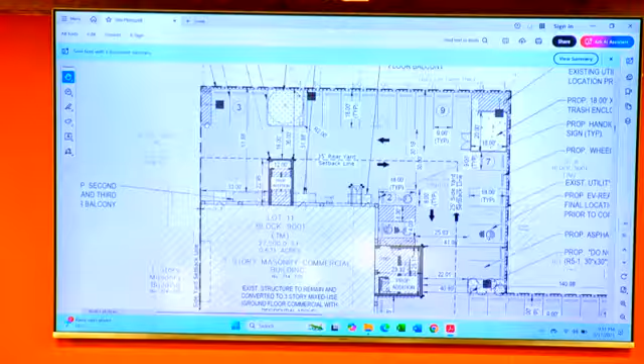You'll definitely want to look at the property that runs across the back of the other building where the bagel place and the auto store are. Are those separated in any way legally? How is it that the guy in 002 can drive around the back and drive across your property to come out? Is there an easement, or what is it?

It's just a pavement, right across the back. He tried to fence it probably 20-25 years ago, and it was open for so long that they made him open it up again. Basically it's been a throughway for so long that they won't let him close it off. They actually had it fenced for a short time, and 002 went and might have gotten a lawyer involved, so I'm very familiar with it.

Okay, so they made him open it up again because it was open for so long—they let him use it as a throughway for so many years that they told him he couldn't close it off. The only thing is it impacts this development right now, this project, so that's why I'm asking. As far as I know, there is no legal easement or rights granted to the neighbor. Again, as part of this application, if that's a concern—and I think there is a valid concern—

Well, it's a question. Who litigated that at one point? The owners of 002 at that time. But did it go to court, or just settle?

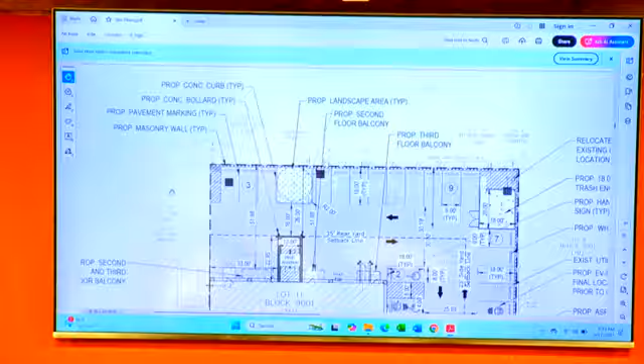Okay, now you might want to look into that. I'm not trying to say block it. What I'm trying to do is figure out how much the adjacent properties' traffic impacts what you're trying to do here. There's a lot of constraints on your site. It's not clean, and so every little thing that's not in accordance with our plan has to have an impact and be discussed.

So I think the landscape square could be moved—I don't think you'd lose much—but the point is there are a lot of constraints on this site with parking, and I'm not sure how each one would be dealt with. I agree with the comment about this addition out the back. I don't know if it can be flipped 90 degrees so it's parallel to the building.

There's dead space in the back in one spot, and it's too tight in another spot. You've got 22 feet of clearance on the main entry to the back, and 20 feet for cars backing out along what used to be the old photomat. I don't know whether that shrubbed area can be moved to give more space there. I have a lot of questions about that, so I think each one you're going to have to address.

You guys bring up good points, but there are questions, and I'm sure once we get to the public there'll be more. That said, he is offering a lot of parking spaces—more than some of the other projects that have come here—so I believe there's adequate parking. Whether there's adequate navigation, that remains to be seen.

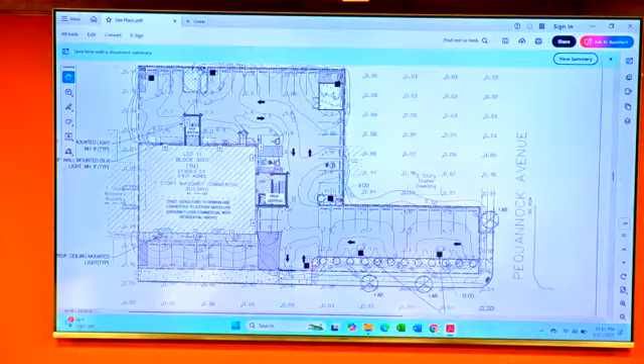The second one is by the trash enclosure, right in front of that. That's my house. Yeah, but these light fixtures are facing towards the parking lot. And as I mentioned, the fixtures we selected are LED, full cut-off, meaning you don't see the glow or shine going across, and they're all dimmed.

Right now there is a pole holding wires in between our home and Frank's house, right on the lot, on the corner, supposed to put it all the way into the corner. Is there a proposal to move that all the way back where the trash is? Yes, it's an existing utility pole to be relocated, and we have the new location right here. Can you explain what that's gonna entail, and what height is that?

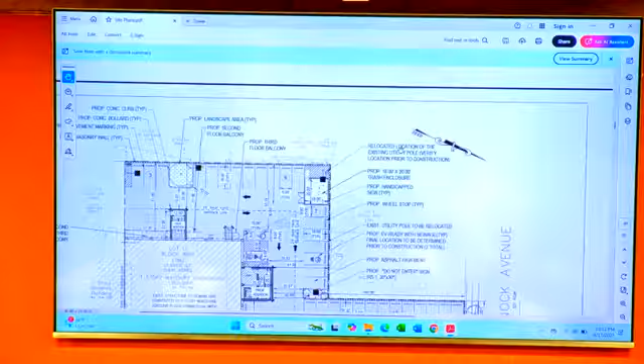It's the same pole. Usually the process for utility pole relocation is first you have to find out which utility company is using that pole. It can be Verizon, Optimum, two or three different companies, so you have to coordinate with them, but one company would own the utility pole. You contact them, and that's all done as part of the construction process. Before any work is done on the property, you contact the utility company, they contact the other utilities, then they give you a proposal, the applicant picks up the tab, they schedule it, and then it's done.

So will the wires then be coming from the street now all the way through the backyards of our homes, in addition to the high rise units you're trying to put in? No, actually what will happen is the utility pole is shifting from here to here. So the path of the wires will remain the same, it's not shifting. Only the location of the pole is being shifted.

So the wires don't shift down with the pole? Whatever is connecting right now, if it's connecting from the street to the pole, and the pole moves up, it's going to still connect from the street to the pole, but the pole is a little further up. The pole is there to support the street lines, that's why that pole's there.

So you're gonna have a big cable going straight across, in my view, in my backyard, going to the other side? Correct. Yes. And the dumpster, the setback for a dumpster in this should be how far from my property? I think it's 17 feet. 17.5, yes.

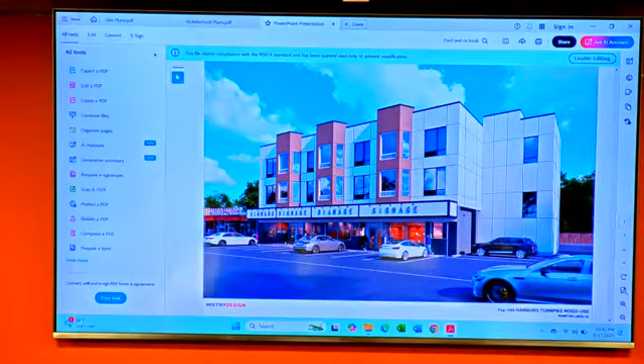Sure, I'll just start with this exhibit. I believe this was submitted as part of the package that was submitted on behalf of our firm. This is a 3D color rendering of the proposed project. It doesn't have a date on it, it just says 714, 720 Hamburg Turnpike mixed use, Pompton Lakes, New Jersey on it.

Pardon me for interrupting, this was actually not part of the original application, so this would be applicant's A1. Do you have any hard copies? Because you have to have a hard copy that the board can maintain. I don't have a rendering of this, I apologize. I did have hard copies, 11 by 17, and I left them at home thinking this was all digital. I left them at the office. We will provide them next day.

So describe a little bit, A1, what exactly is it, and you'll provide a hard copy? Sure, it's a 3D color rendering prepared by our office showing the front and kind of right side of the project in this proposed manner. It's also showing to the left slightly the auto parts store that's currently existing and showing the immediate parking in the front of the building. So this would be exhibit A1.

I just wanted to start with this because it gives you a general overview. I think the engineer described the general intent of our project, which is to keep the existing one-story strip retail center. I believe there are 3 stores currently, with 4 slots for retail. 2 are a liquor store, and I believe there's a pharmacy and a pizza shop to the left side of the building. Those are going to remain.

There's also a basement. The footprint of the building is approximately 5,630 square feet, and the basement is essentially the same footprint, used just for storage. So we want to retain that, and then put 2 stories of residential apartments directly on top of the building. The 2 stories will compose 10 new apartments.

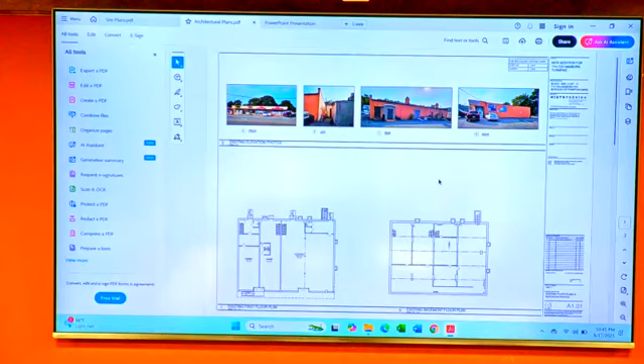I don't know if I need to mark this, but these are the same drawings. Again, this first page, A1.01, shows the existing conditions. There are 2 floor plans, the first floor and the basement, at the bottom of the page, with photos running along the top. It's just a simple, sort of outdated strip mall.

And these are the proposed floor plans, starting in the bottom right. The basement is going to remain as is. We are going to add a stair and elevator tower to the right, which will connect all the floors, including the basement. There's also a stair tower in the rear of the building, which would only serve the residential portion.

To the left of that is the first floor plan. Again, the retail tenants would stay the same. To the right is the stair and elevator tower for the residential apartments, and at the rear is the fire stair tower to serve the residential units. The second and third floors, which are almost identical, will have 5 units per floor.

Again broken down into the ratio I just mentioned in terms of 1 bedrooms, 2 bedrooms, or 3 bedrooms. There'd be 3 units that face the Hamburg Turnpike, and 2 units that face the rear of the property, with just a corridor down the middle connecting the 2 fire stairs.

All the units will be ADA adaptable, and accessible through the elevator. They'll be all new, up-to-date, modern apartments, and all sprinklered. The one bedroom will have 790 square feet at minimum, the 2 bedrooms are 1,090 square feet or larger, and the 3 bedroom is 1,270 square feet.

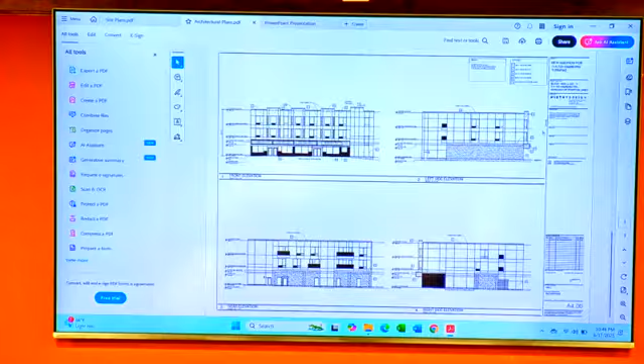I know there was a comment regarding the stair in the back and why it was oriented perpendicular to the building versus parallel. It's essentially because of what's going on in the back - there are exit doors for the retail tenants there. If I rotated that 90 degrees, it would impede on those exits. In addition, anything on the second and third floors would block all the windows. So we positioned it the way it is for that reason.

I know there were also fire comments regarding fire department connections and locations for fire alarm panels. We have no problem coordinating that with the fire department, and wherever is appropriate for them, we could locate it accordingly, as well as providing a Knox box where they feel it's required.

That's really it. I think it's a great improvement to the property. It provides mixed use to a property that's kind of underutilized. I've been there many times, and the parking lot is definitely not full. There's people that kind of come in and out of the liquor store, and then I think the other two tenants are going to use it.

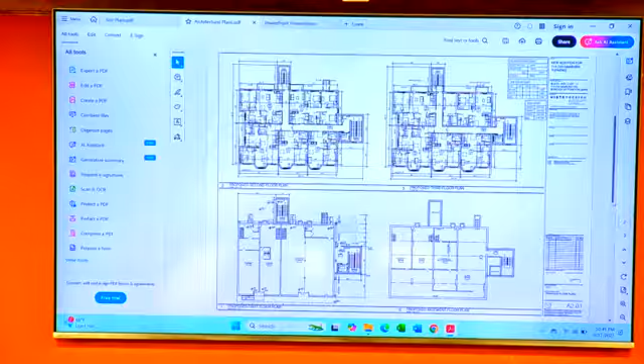One thing, I know there was a comment regarding the access to the back between the two properties. My understanding from discussing with the client is that his intention is to block that and just put a fence up, because he doesn't want people from that side, once this development is done, to go onto his property and use his parking stalls. He doesn't know of any easements or restrictions preventing him from doing that.

I think that's about it for me. Any questions from the board? Okay, I think rather than have questions from us or the public, we'll call it a night, I believe. Anyone have a problem with that? No? Okay.

The announcement will be that this will continue at the next planning board meeting. Is it scheduled for July 22nd? Those who got notices... actually the 15th, yeah, July 22nd is too far out. July 15th at 7:30 p.m.

Right here, with continuation, questions for the architect, any other testimony they want to bring, and then we'll have discussion and comments, and we'll see where we go with that. And just to clarify, we will not need to renotice for this meeting, correct? No notice required, note that this continues on to July 15th. And the notice that the planning department puts out will also show it, so if anybody has any questions, that'll be in the newspaper anyway.